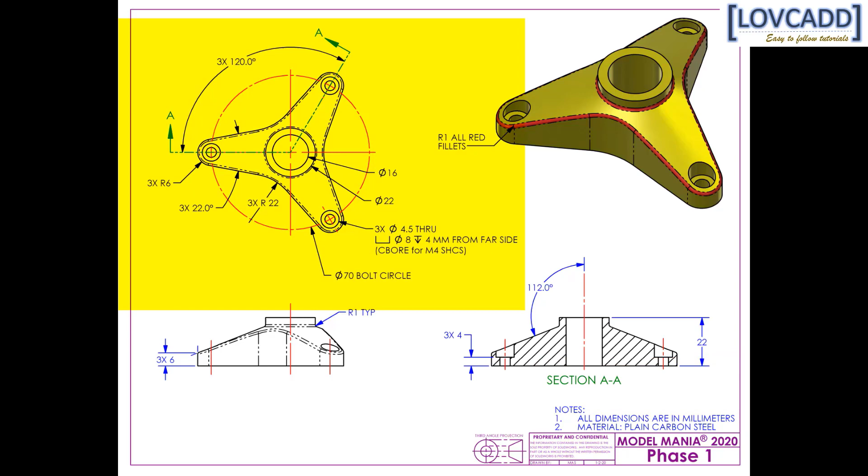Now see all the information given in this detailed drawing of Model Mania 2020. First look at the note which says material is plain carbon steel. Then see the dimension in this basic sketch, which I am going to first draw in SolidWorks.

Now open SolidWorks, go to part, select material, go to edit material, select carbon steel, go to configuration, OK, click apply.

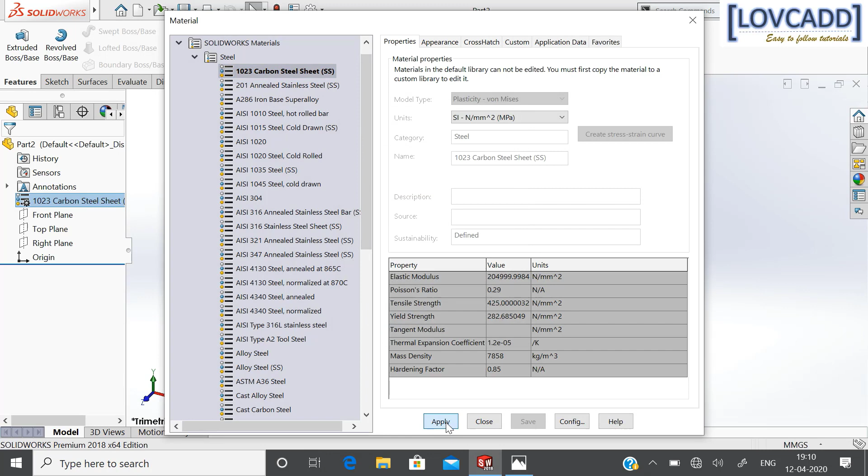Now start from top plane, go to sketch, select circle and draw two concentric circles at origin. Assign the dimension as 22 mm and 16 mm.

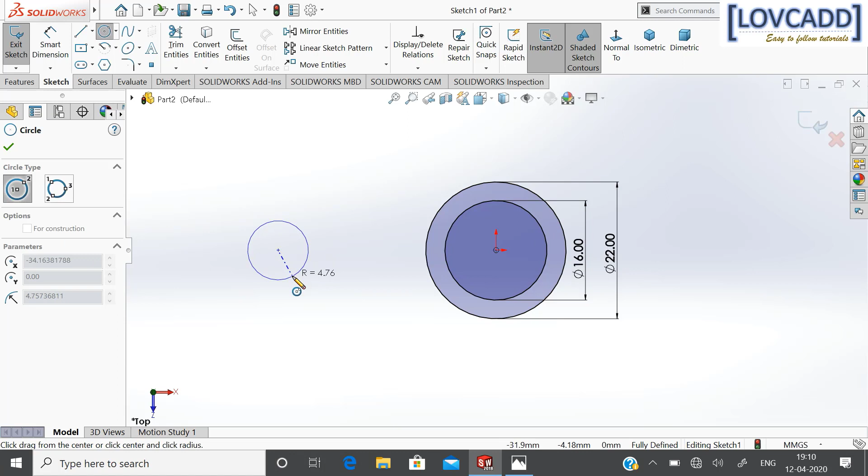Next, again select circle. Draw a circle at a horizontal distance from origin. Select center line. Now again select circle, draw a circle. Check for construction.

Now select smart dimension. Assign the dimension as 12 mm diameter. Now for radius, go to leader line and select radius. See how this will show you in radius.

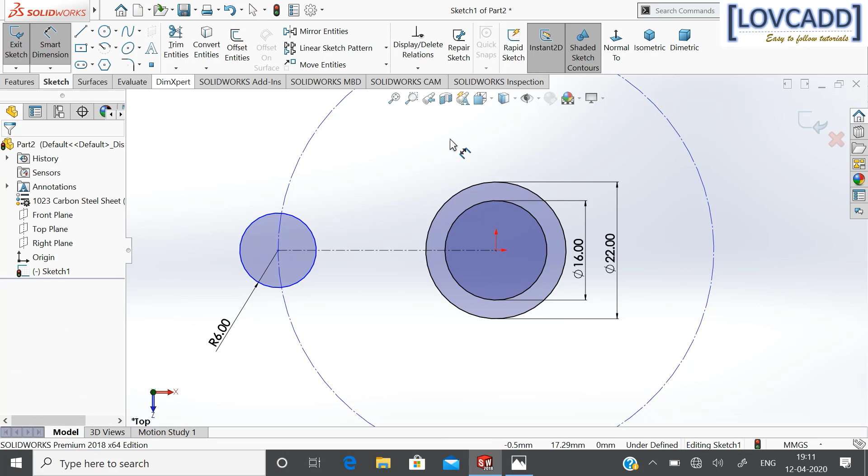Now again select smart dimension. Give 70 mm diameter to the bolt circle as you have seen in the drawing.

Now select line, draw an oblique line here, select these two lines, go to mirror, again select circle and this line and add relation tangent.

Now again go to smart dimension, assign angle as 22 degrees, adjust the dimension. Now select line and connect these two points.

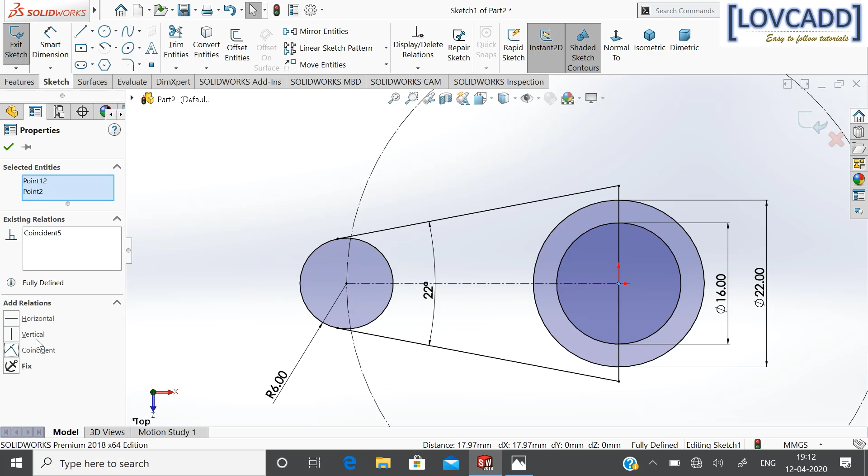Now press shift and select the center point of the line and the origin, and give the relation coincident.

OK. Now go to features, select extrude boss, select these two parts of the sketch, give height as 22 mm.

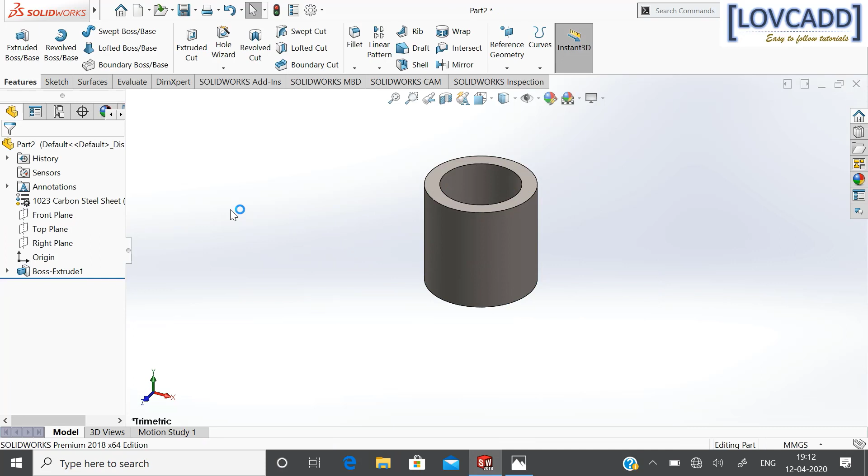OK. Now as we are going to use the same sketch for this, click on sketch and click show. Now go to front plane, go to sketch, normal.

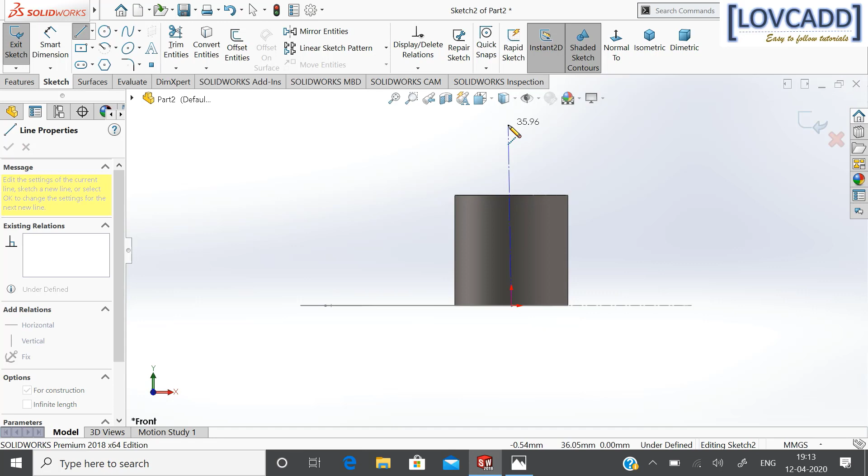Now select center line, draw one vertical center line, select line, draw one slant line, again select center line, draw one vertical center line over here.

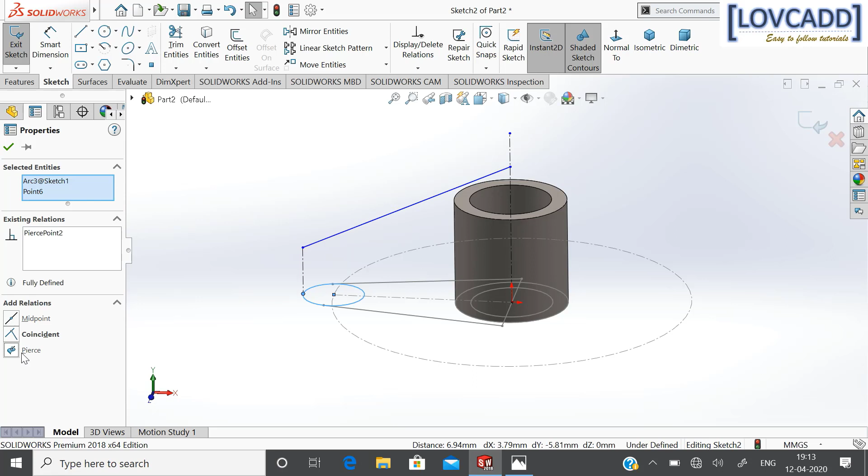Now again press shift and select circle and this point and give the relation pierce. OK, press normal. Assign the dimension as 6 mm and the angle between these two lines is 112 degrees.

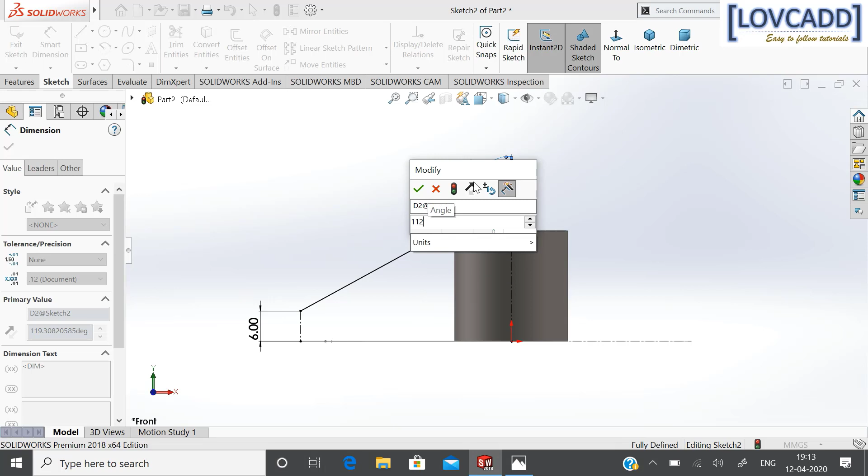Now enable surface command here. Go to surface, select revolve surface and select this center line. Blind 360 degrees, press OK.

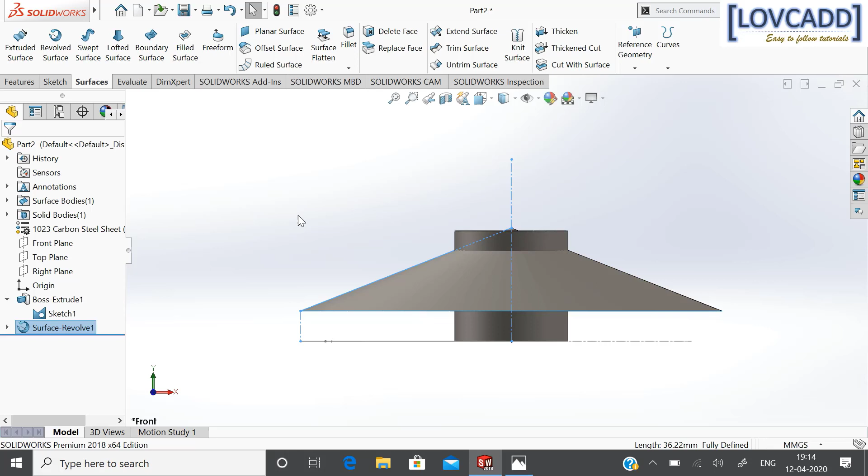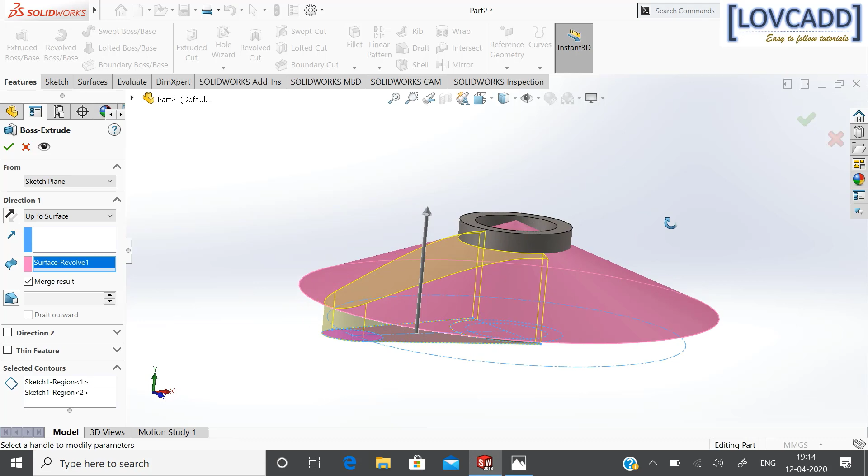Now for the curve surface, go to sketch, go to features, extrude and select these two portions, and in option select up to surface and click on the surface. Now see how the curve is generated over this surface. Click on OK. Now simply click this surface and press tab.

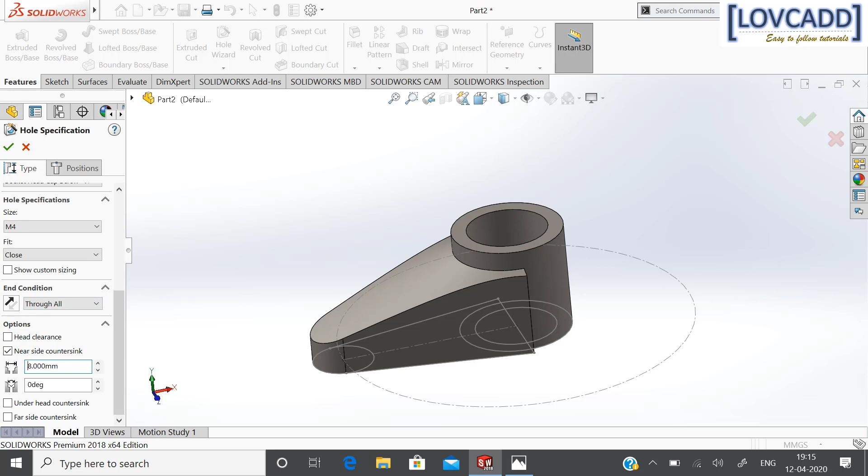Now go to features, hole wizard, select counter bore, then select socket head cap screw, select ANSI metric, select M4 size and keep the rest of the options as it is. Now go to position, select this surface, press normal.

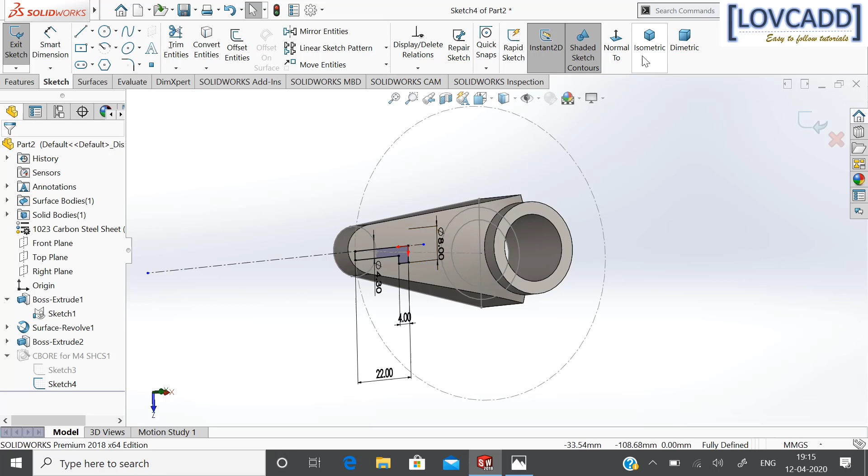Now add this counter bore at this position. Now simply select counter bore and go to edit sketch 4. Press normal. See this dimension.

As per the drawing, this is 8 mm. This is 4.50 mm. Okay, now simply select this dimension, press delete and add new dimension.

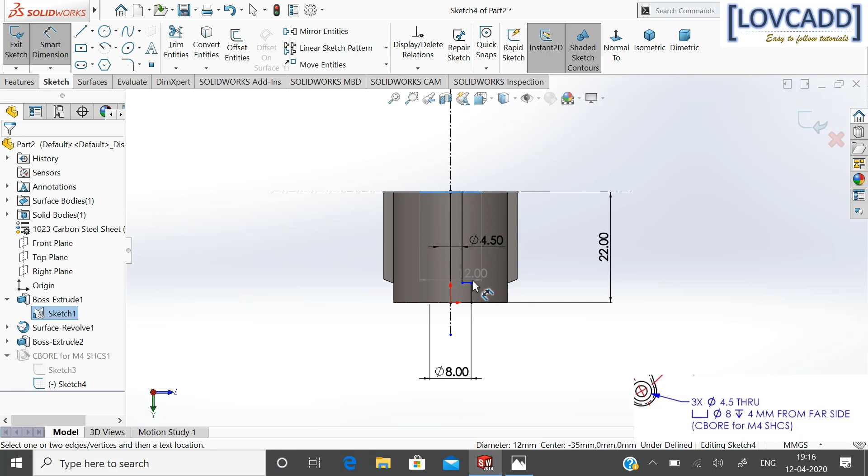So go to smart dimension, make it 4 mm from this edge. Done. Now see what I have done. Okay, as you can see, the dimensions are as per the drawings. Okay, now simply exit the sketch.

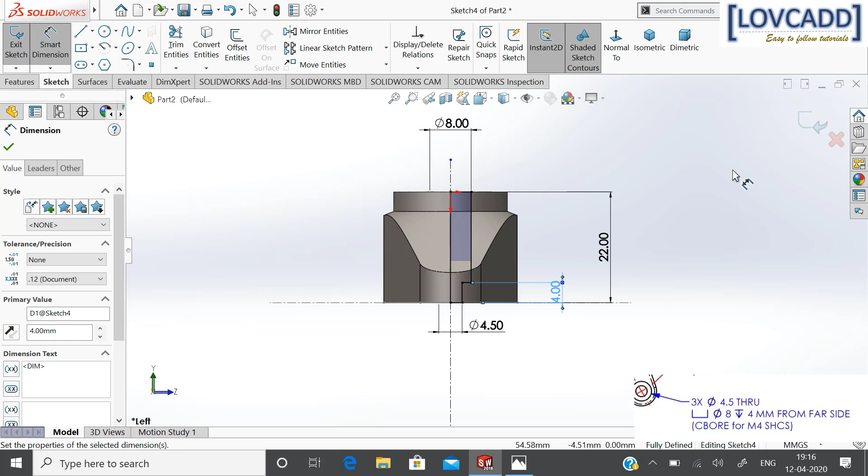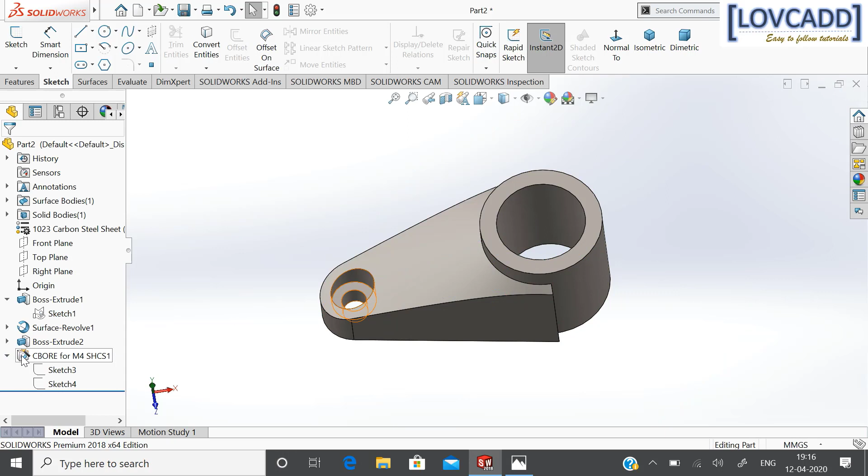Now go to sketch 1, hide the sketch. Now simply select the counter bore and the boss extrude option.

Go to features, select circular pattern, select equal spacing 360 degrees and 3 numbers of pattern. Select this surface. Okay, now this is the basic shape.

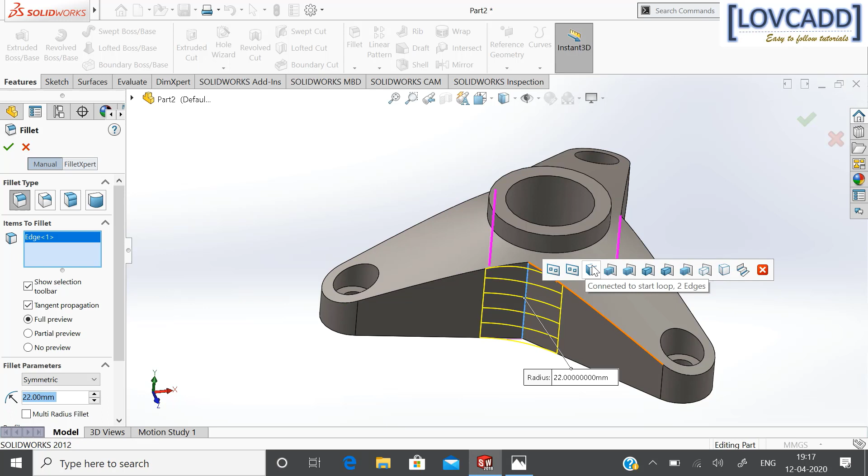Now go to fillet. Now assign the dimension as 22 mm for the fillet radius. Select this edge and drag the mouse to this option which says connected to start loop, 2 edges. Okay, now see this is applied to all 3 edges.

Now again select fillet, select the radius 1 mm, select this edge and apply it.

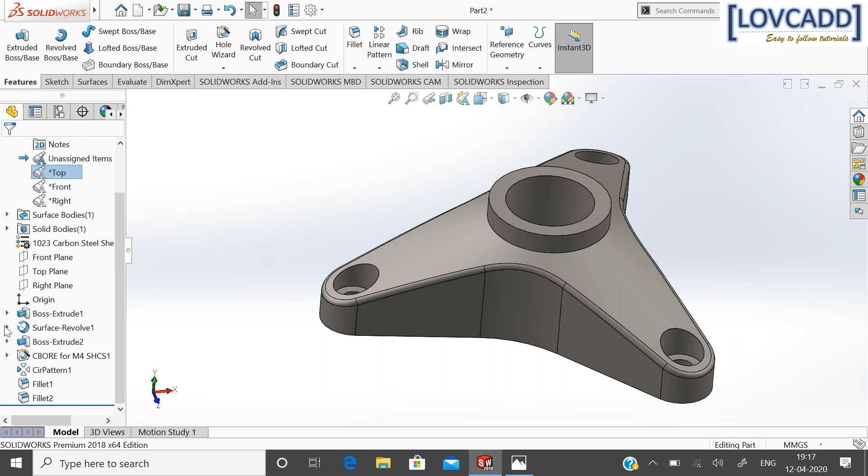Now I am going to apply the color. For this, select fillet, go to edit appearance, select the red color. Okay.

Now select the whole part over here. Now again go to appearance and select the yellow color as we have seen in the drawing. Press OK.

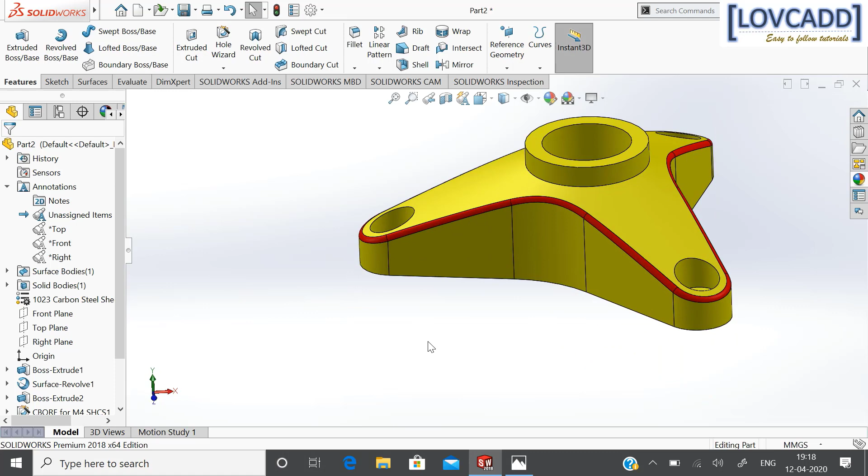So this is how our Model Mania Phase 1 looks like. Hope you all will like and share this tutorial.